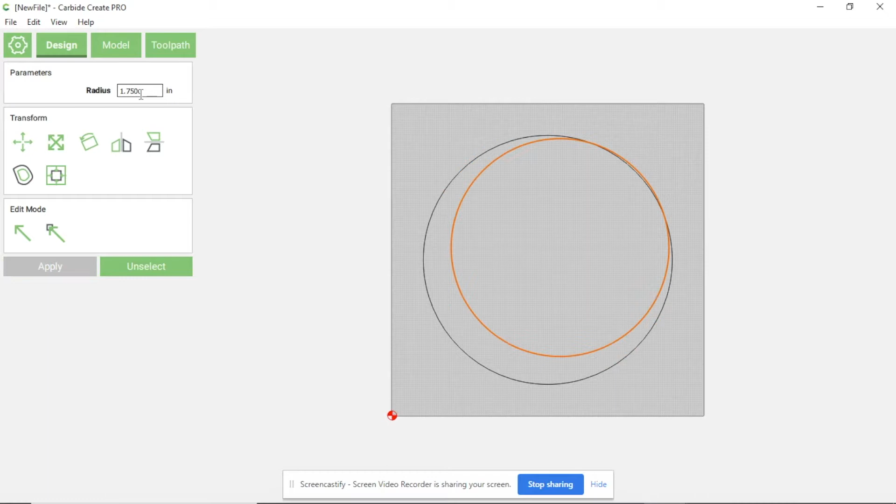So I'm just going to make a copy of this one. I'm going to do Control C, and make a copy. Then I'm going to resize this, I want a 3.5 inch diameter, so that's 1.75 inches radius. I'll just bring that back to center.

That's going to create the inside of the lip, like you guys see right here. That's going to create that inside piece as we get ready to have that lip for it to sit on.

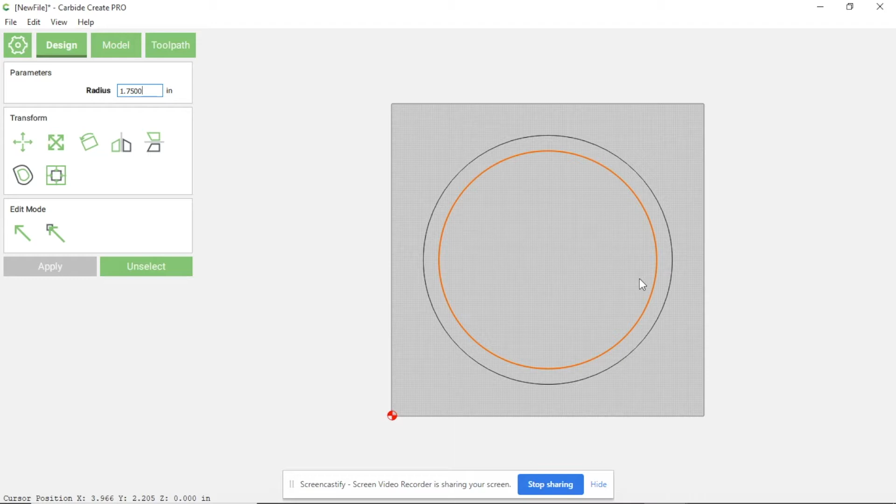Now this is going to have an 1/8 inch lip that goes around there, so we'll just do a little quick math, an 1/8 inch on top of that. I'm going to make a copy again, Control copy. So what's 1.75 minus 0.125? So 1.75 minus 0.125... that'll be 1.625. Hit enter.

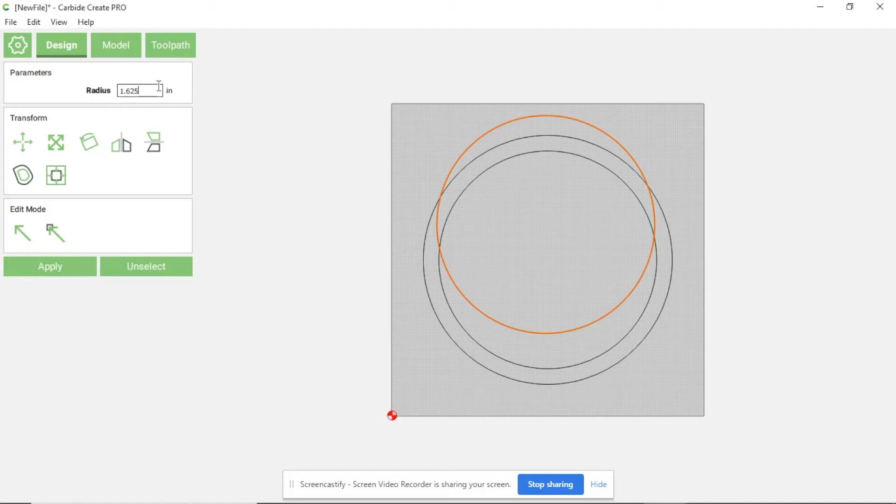Again, I'm going to center that. That third circle is going to create the inside lip that we're looking for, that the sounding board will sit on top of. So we just added that there.

All right, the next part I want to show you guys how to make is the center of the turkey call, where the sounding board is going to rest. You'll have the inner lip to hold it in place, but you also want this section to be able to support that sounding board.

So we're going to start in the middle. Again, I'm going to start by just making some circles. The inner circle I want to be 0.75. Go ahead and center that to the stock.

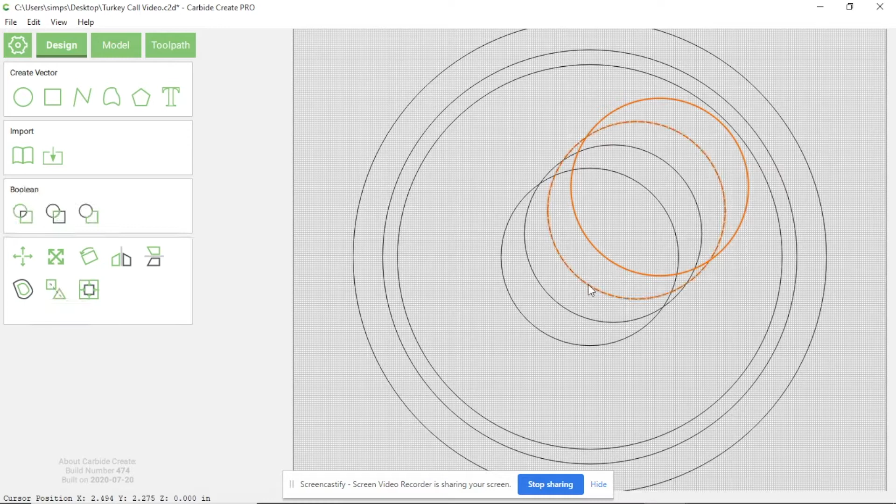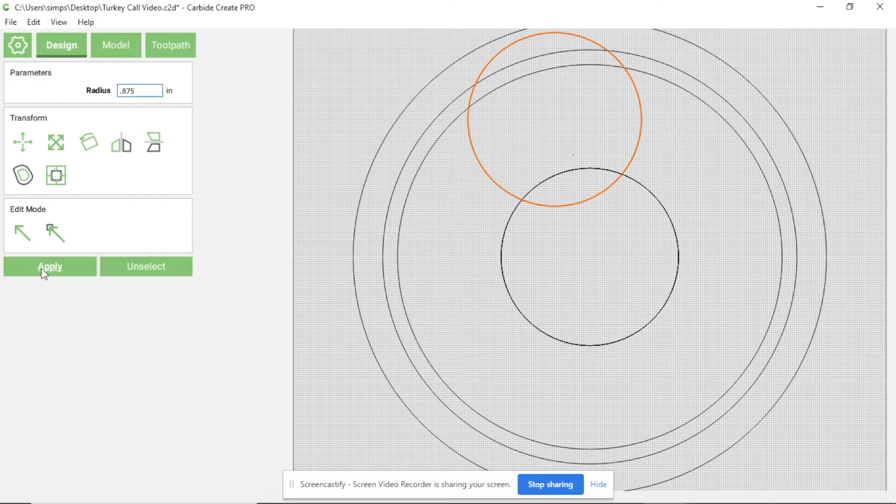I'm going to make 3 copies, and I'll explain why in just a minute. I'm going to select those all as well, and align them to stock and center. Then I'm going to make one more circle, and this one's going to be an 1/8 inch bigger, so 0.875. Again, I'm going to center that to the pieces.

Now, in order to get this little indentation cut out, we've got to go through some of the process using the Boolean, intersection, and subtraction features. So I'm going to start with a rectangle.

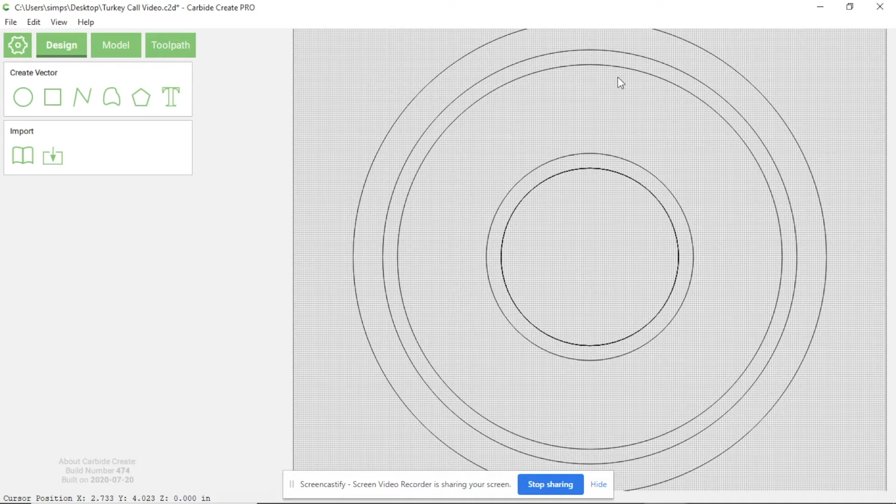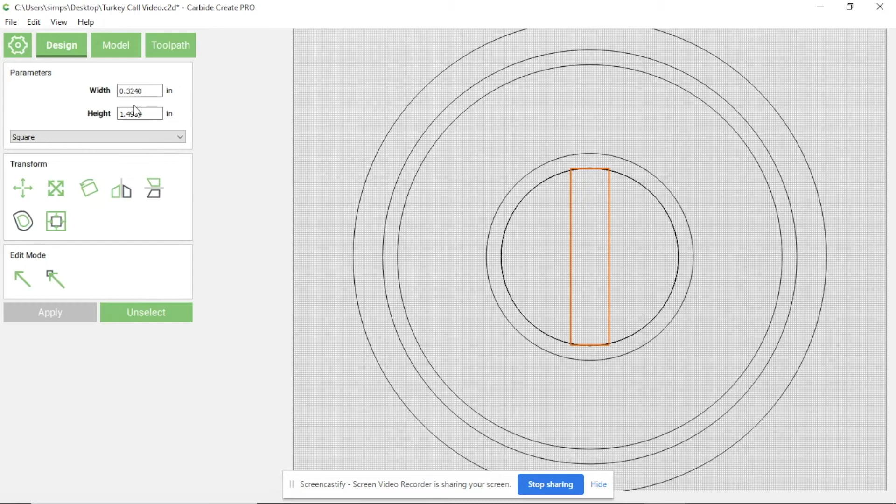So I'll go to rectangle over here and I'm just going to draw. I want that to be 0.5 by 2 inches, and again I want it centered. Put that in there. I must have hit something wrong. I want that 0.5 by 2. All right, there we go.

I'm going to need 2 of these, so let me do a copy of that, Control and Shift and C, and then I want to align those. So again: inner circle, the rectangle, Boolean feature, subtraction. Okay, then I'm going to do the same thing with the outer circle.

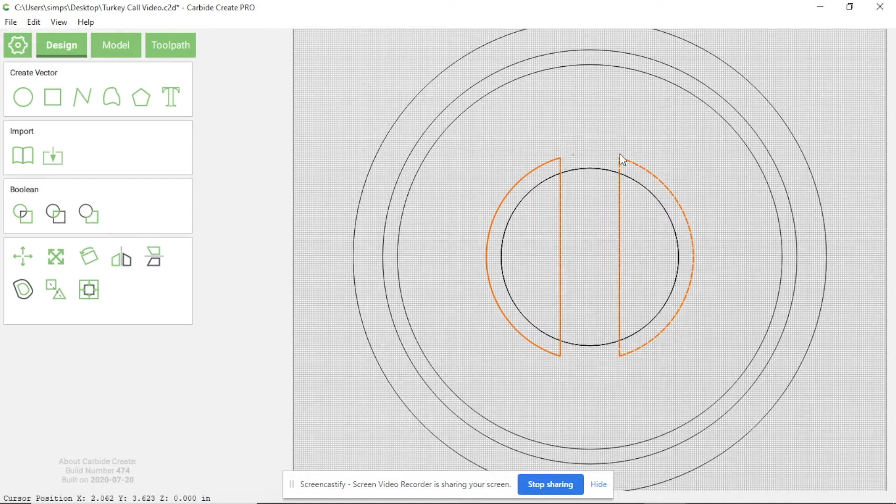Click that rectangle, and then I'm going to do the subtraction feature. Now I've got these inner circles again, so I want to start with this half circle of what I've got, and I'll click that first. Then I'm going to click one of the other inner circles and hit the subtraction feature.

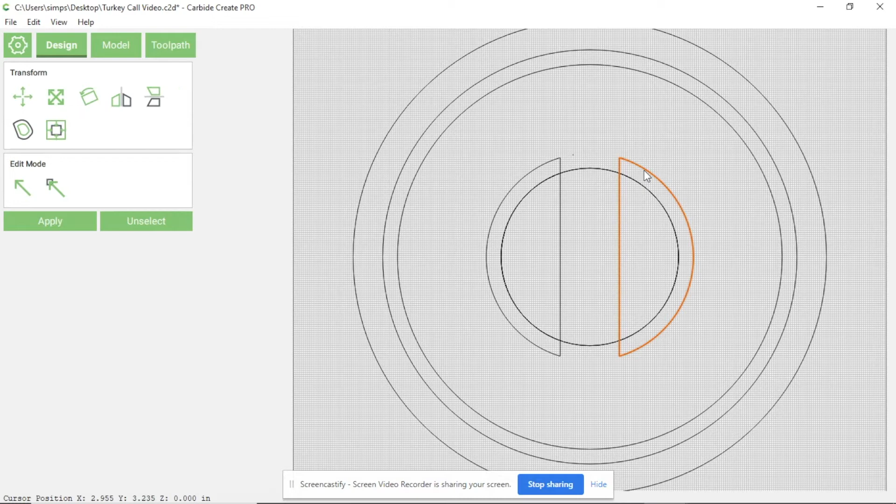Lastly, I'm going to grab this other side, the half circle. I'm holding Shift, I hit the inner circle, and then I hit the subtraction feature.

And then if I come back in, I'm going to highlight that and hit delete. I'm going to highlight that and hit delete. I'm going to highlight this and hit delete. And then I have this inside circle that's been created on the design.

Now within this, I can select these and do a tool path that will show a pocket. So let's click on that.

I'll change this to a quarter inch end mill because that's what I'm going to be using. Whenever we look at that, we see the pathway it's going to do, and I'm using all of the standard settings that are already programmed into Carbide Create.

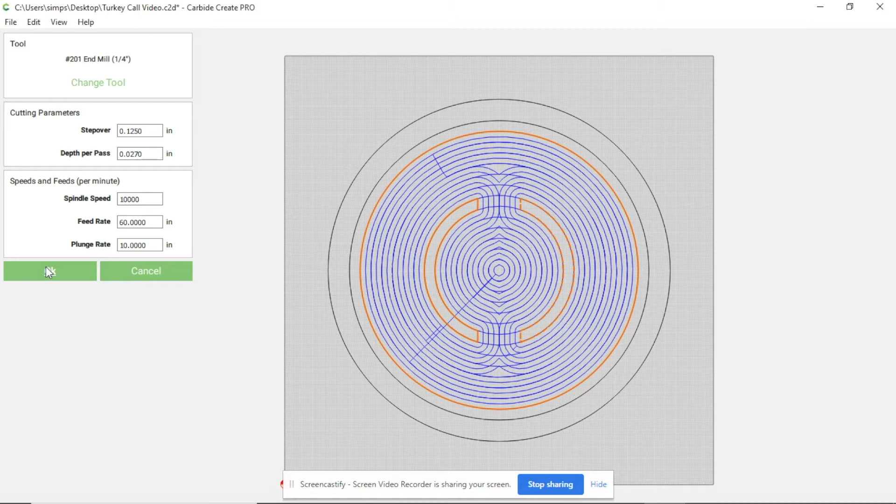I hit OK, hit OK again. Whenever I come out, I look at the toolpath that's going to happen, and it says for me to go from 0 to 0.8 is going to take 5 hours and 51 minutes. We know that that's just not feasible.

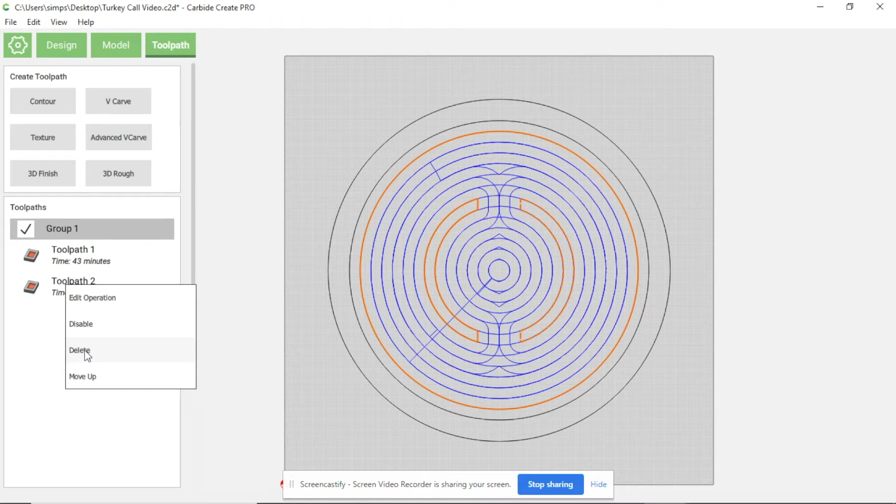So I'm going to have to try a different solution. What I'm going to do is just make some circles and see if we can cut that down. So let me delete that and go back to the design.

I'm going to copy, and we're going to end up making 6 more circles. I'm just going to hit Control and copy: 1, 2, 3, 4, 5, 6. Then I'm going to go back to this particular one and start making those sizes.

This one needs to be 1.385. Since I'm using a quarter inch end mill, I'm just going to use a slightly smaller circle than a quarter inch. So the way this is set up, it looks like I'm using 0.24, and I'm going to have a little bit of overlap there as we go through that.

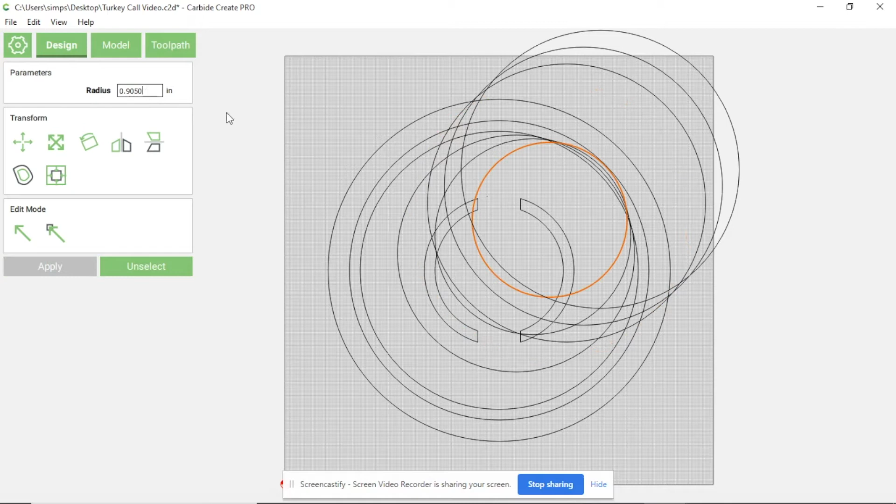Then I've got 1.145, okay. I've got 0.905, I'm going to hit OK. And I've got 0.5, I'm going to hit OK.

Now all of these need to be centered, so I'm just going to hold Shift and start clicking these guys. I've got to get them in the center of the deal here.

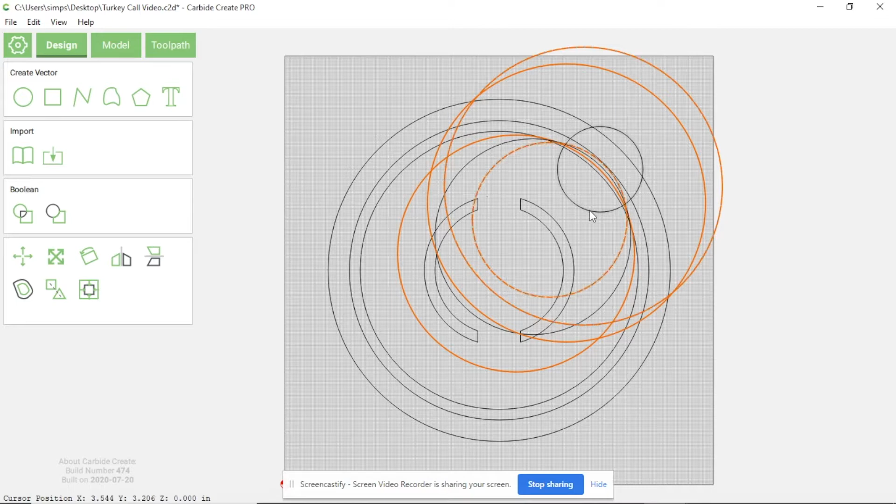So I want that aligned to stock. Something didn't happen there, align to stock. Try again. Align to stock, boom. Oh, there's one more that I missed here. We'll align that with the stock also.

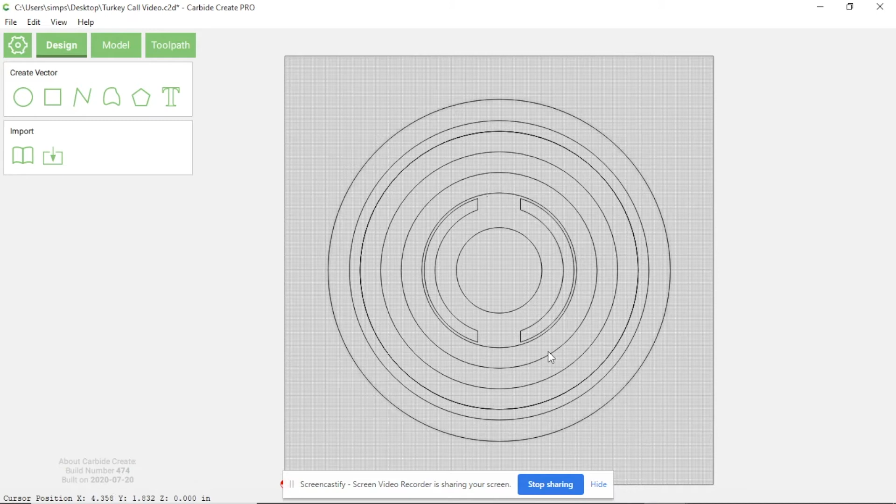So now I have all of these different circles, and we're ready to start going in here and cutting and setting up the tool paths for this. I think we're going to find that it's going to be much less time than what we said.

The other thing we want to do on the turkey call is make these sound holes, and each of these is almost a quarter inch wide. The problem though is you think of this router bit, this end mill, as a drill bit that's just going to go straight down and back up, but unfortunately that's not really how the CNC thing is set up.

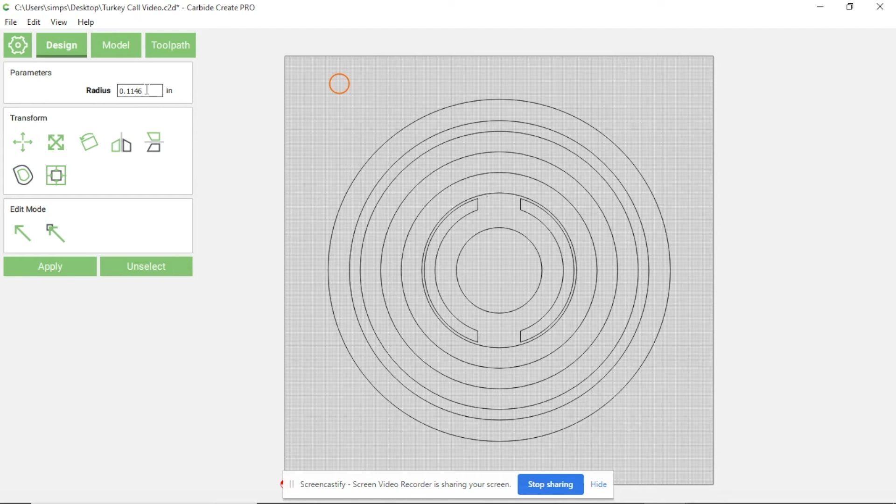So you actually have to make this hole a slight bit bigger if we want it to end up being 0.25. We'll set these at like 0.27 as far as diameter, and we'll be able to accomplish our goal here. Let's do 0.27.

If you look, remember when we hit 0.27, that's radius. I don't need 0.27 radius, I need a 0.27 diameter, so 0.27 diameter would be 0.135. Okay, let's just do 0.13 and get it like that.

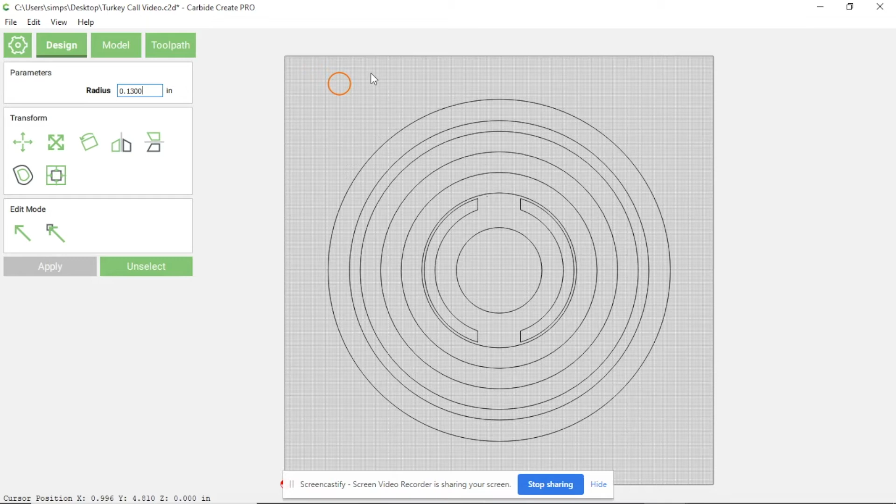Then I'm going to make some copies. Again, I'm holding Control and C. Control C: 1, 2, 3, 4, 5, 6, 7, 8, 9. Made one too many. Well, let's just drag these and pull them all down here.

So we'll start by dragging these guys in here, and I'll do a center alignment. I'll just get these kind of close, and I'll use the circle that's already in place to help me get the alignment that I need. We'll get close, and then we'll add a little bit more here.

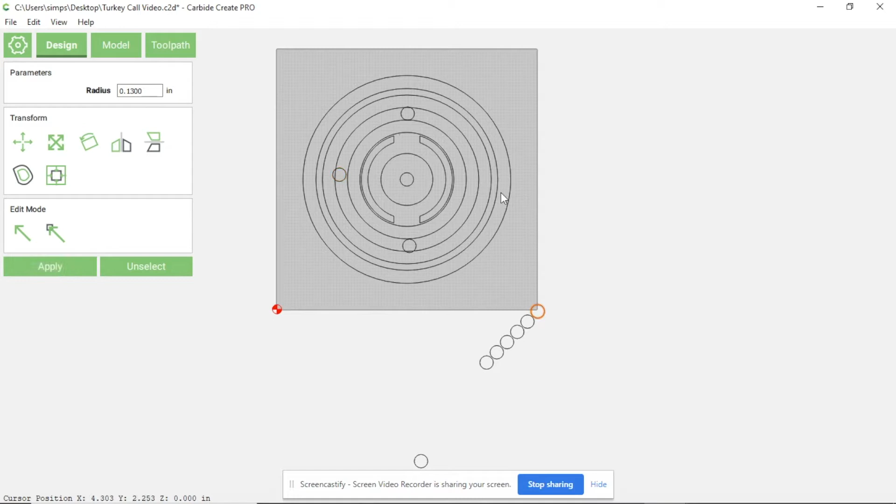There we go. So I'll click this one and this one, and we will align that left to right.

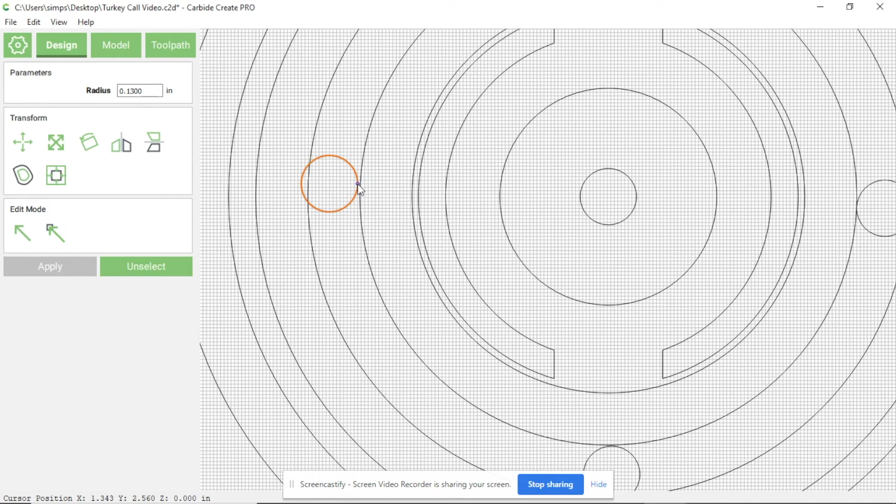Let me zoom in there. You can zoom in and get this right on the edge of that other one. So got those two, and on this one we want to align these vertically.

Then again, I can go back in, get pretty close. These don't have to be super exact. I don't think a millimeter off one way or the other is going to impact the sound too greatly. Then the other four, I'll just start eyeballing and try to get them equidistant and placed in there into the design.

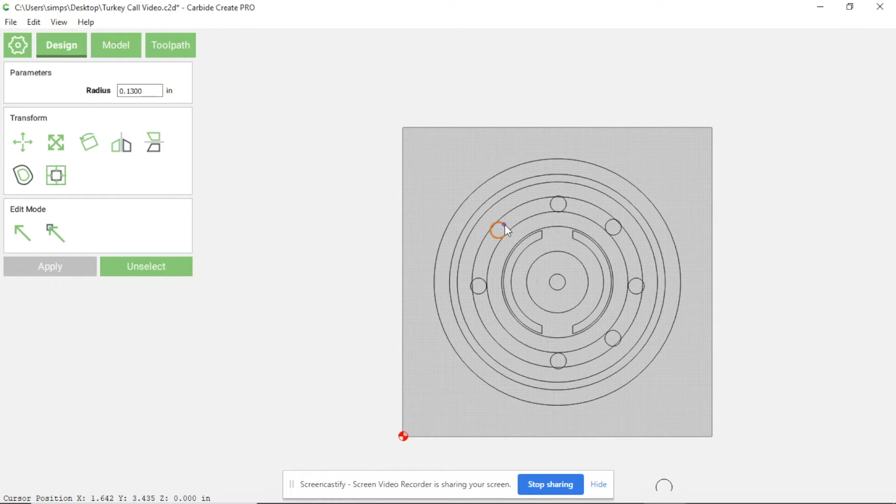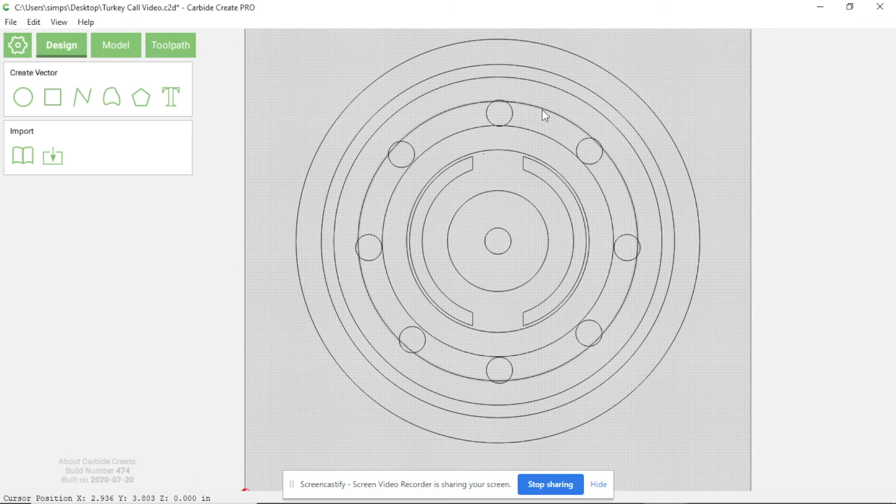That's got them all. Okay, so now if we just zoom in, we can start to see this taking shape as to what we want it to look like. And I think it's going to turn out really, really nicely.

Okay, now again, that's just a quick tutorial on how to get those holes. I have all 8 of those aligned now. I've got the center hole aligned in there.

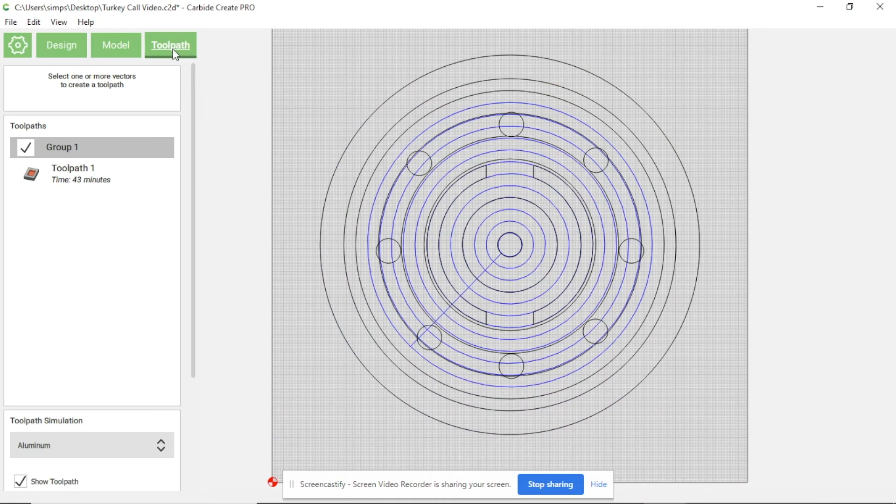Now it's time, we've got everything designed. Everything now is in the program just like that we want it to be. And it's time for us to set some tool paths. So let's switch over there, let me get to that point of at the tool paths.

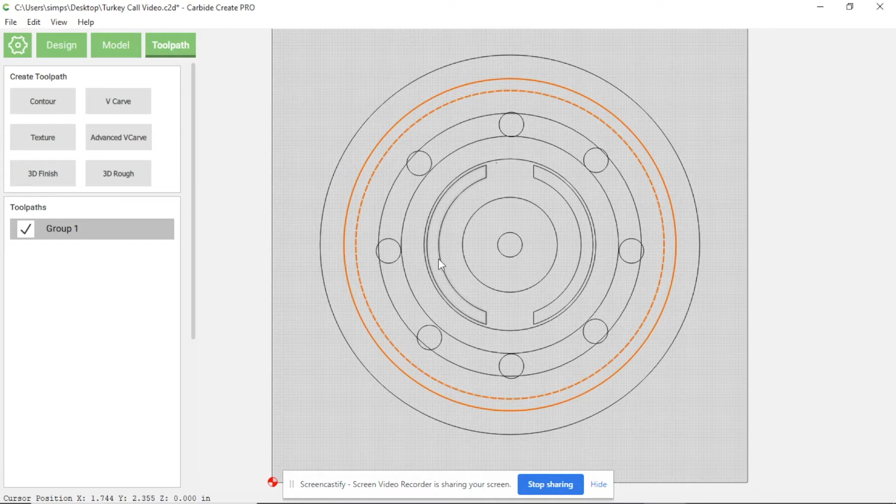And so I'm just going to delete this one. I don't even remember what we did with that, and we'll just start over. But the way that I want to make sure I do this is that this level between here and here, and then these guys.

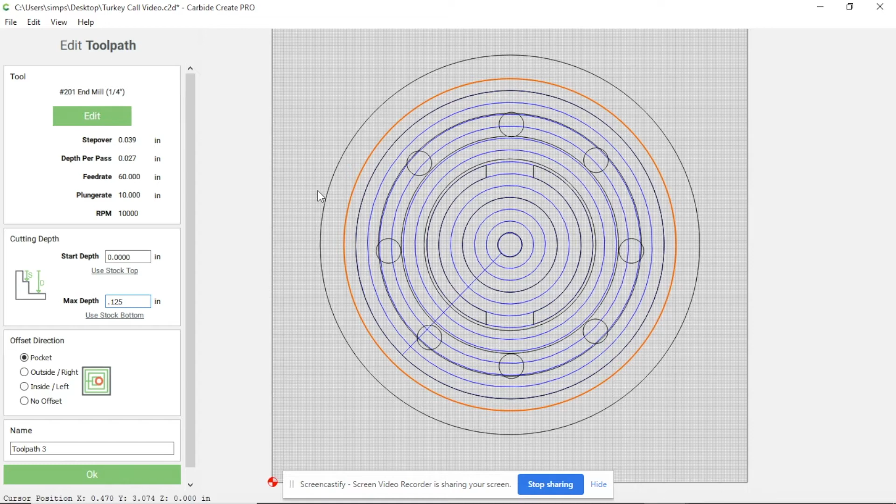All of those have to be the same height. And so I'm going to start with a pocketing path, and I want to cut down, do a contour. I'm going to do a pocket, and I want to go from 0 to 0.125 because I want to go an 1/8 inch deep, because that's exactly the thickness of the soundboard that I'm going to make. And so I'm just going to title this top pocket. That's going to take us 8 minutes.

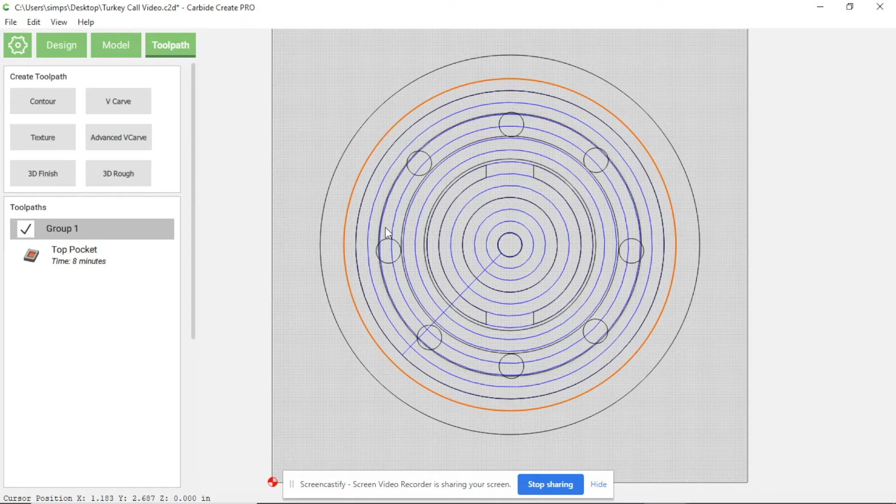Then we start going in a little deeper and a little deeper and a little deeper from there. And so I'm going to click this guy. I'm going to do a contour path. I'm going to start depth at 0.125 because remember we're already there at 0.125, and I'm going to go down to let's just go to 0.75, and we're going to do an inside tool path, and you'll see that going there.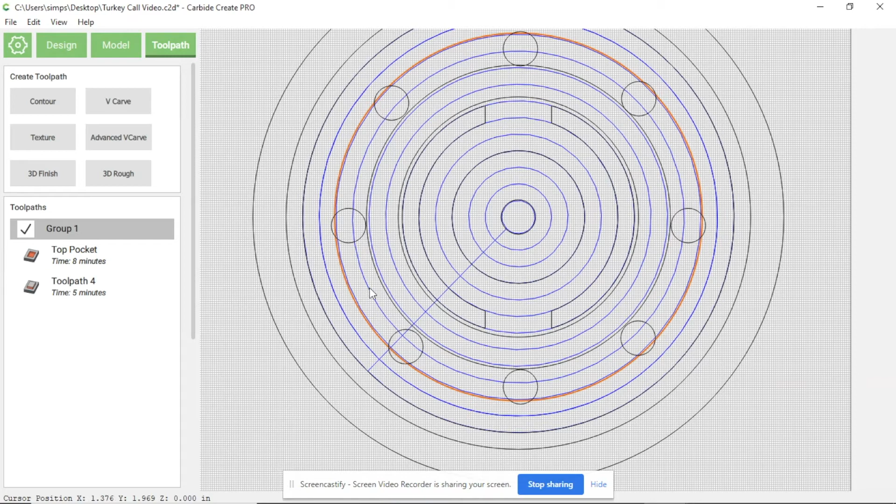Okay, that's our path. Then we'll go to the... it's kind of hard to see them now. Let's go ahead and disable these so we can see them. Enable. So let's see where we've been. So we've done that one.

Now we're going to do the inside here. Do a contour, we're going to do an inside path. We're going from 0.125 to 0.75. We hit OK. Then we're going to do here.

We're going to hit contour, we're going to do it inside. We're going 0.125 to 0.75. We're going to hit there.

This one's a little bit tricky. See how close it is to those that outside. I'm not sure that I want to do an inside tool path. Obviously, if I do an inside tool path, it's going to take off some of that support system.

So I'll probably go ahead and hit contour, and I'm going to make this one an outside tool path. So I'm going to click outside here, and it's not going to get right up next to that base there, that stabilizer, but it'll be really, really close. If anything, it'll make that a little bit thicker, and then we can go back in with the chisel and take out that little bitty part right there.

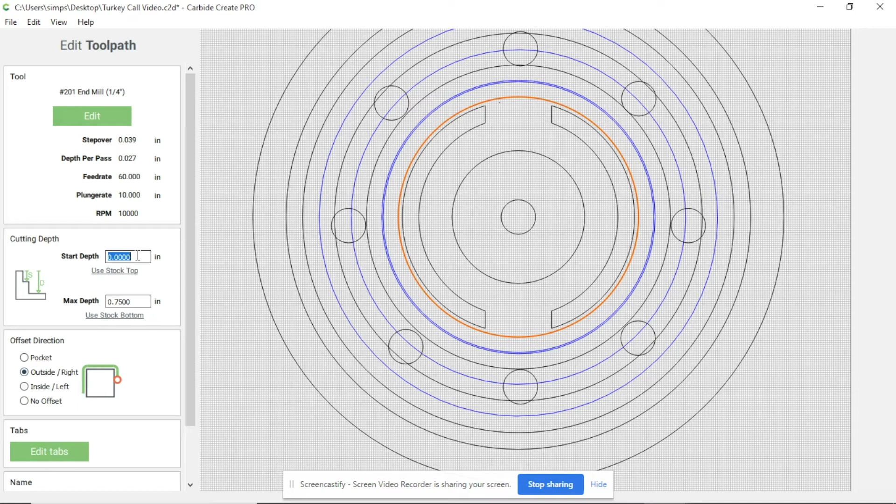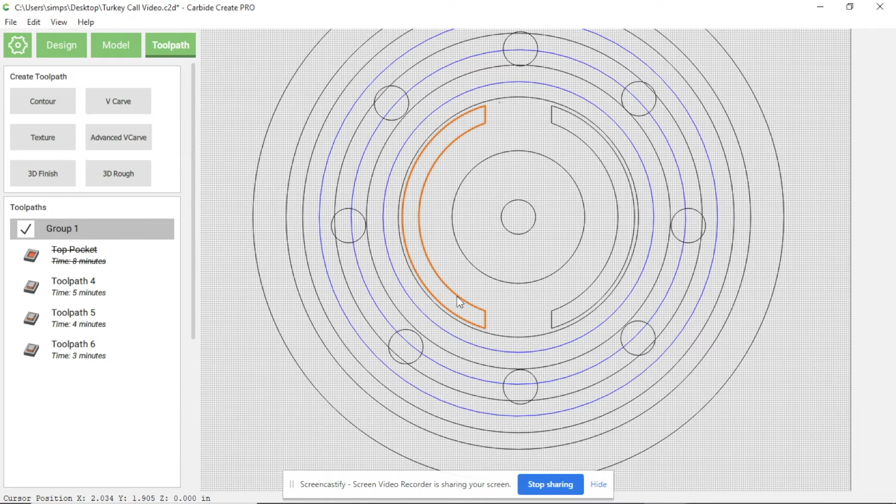So we're going to start again at 0.125 and hit that. I'll tell you what, let's go back and let's make this better, let's just delete this. We'll just go back and we'll say this one, this one, and this one. Let's do contour, and let's do outside right on those.

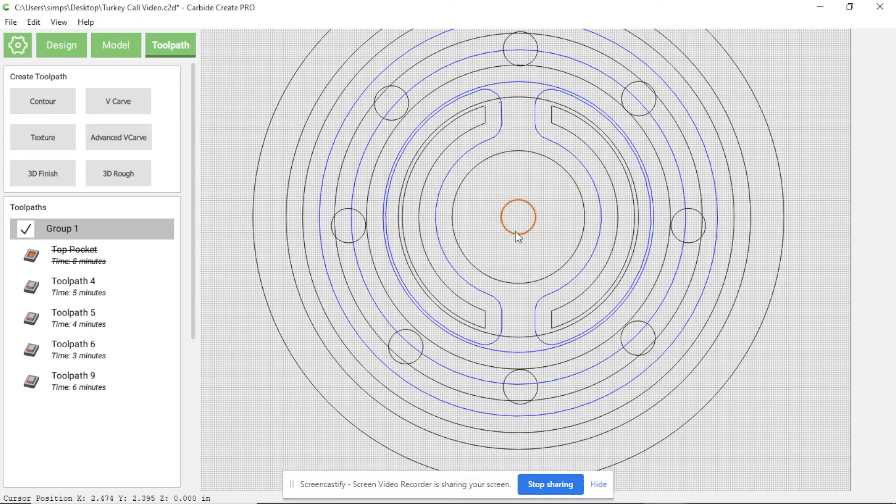And so that's going to get that part there. And then let's go from here, here, and we'll do... let's do a pocket on that one. That should get all of that area.

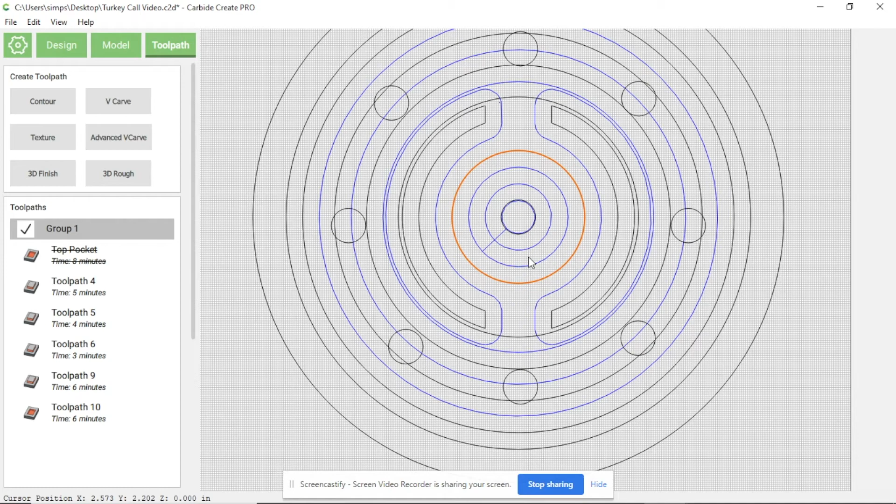Okay, so we've got all of those in place. I'll just go through them again really quickly so we can see. We've got our top pocket that's going to take it down 1/8 of an inch. We start doing paths going from 1/8 of an inch all the way down to 0.75, and we just keep going inside to inside. Okay.

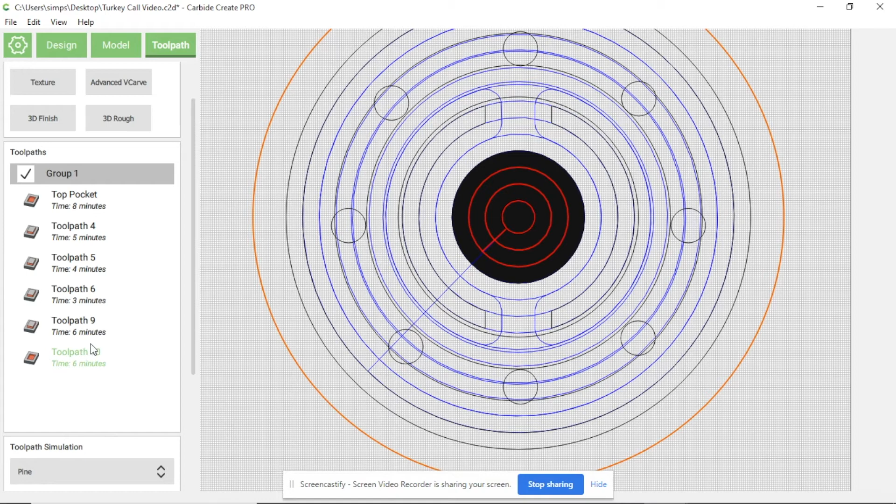The next thing that we want to do is make sure that we get our holes drilled. And so again, we couldn't use just the single 1/4 inch bit.

So we had to make those just a little bit larger than 1/4 inch. I'm going to highlight all those and climb in here to contour again. This time we're starting from where we've cut this all the way down to 0.75 already. Whenever I measured with my caliper, the blank that I had was 0.91, so I'm going to go ahead and go to 0.92.

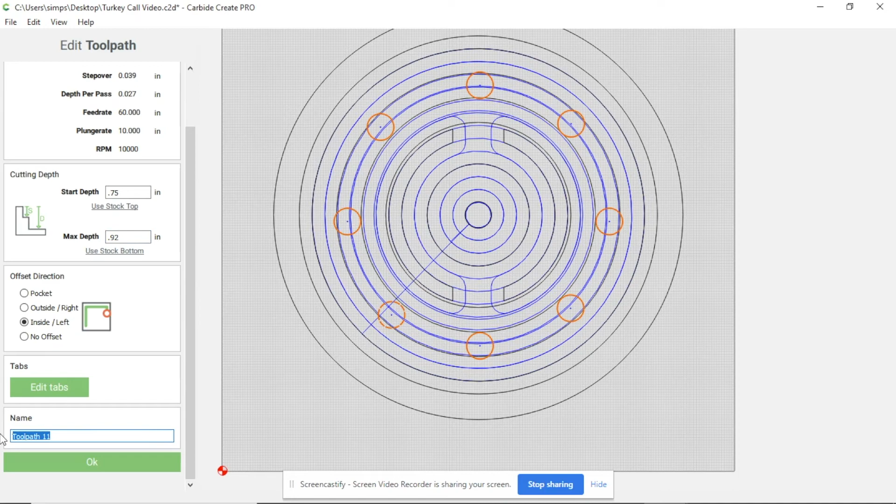That way I can get it done. I want this to be an inside cut, on the inside of that hole, and I'm just going to call this sound hole. That's going to be done in under 2 minutes, so that's good.

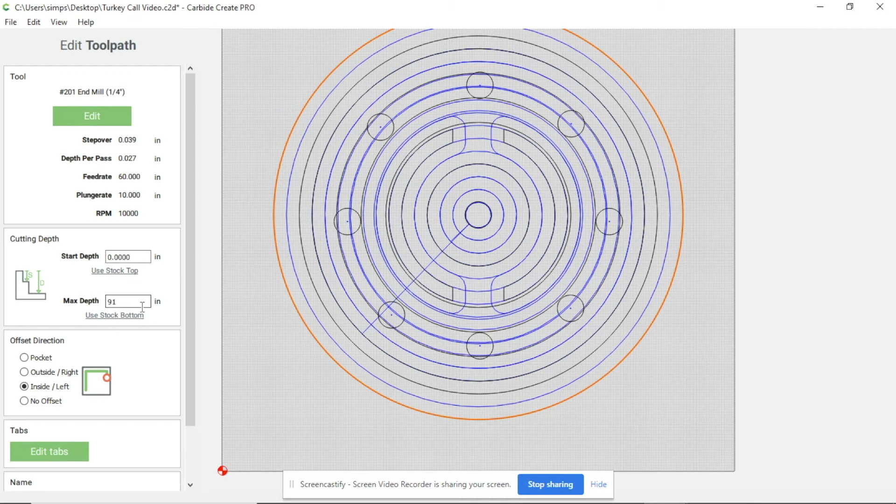Last thing we're going to do is cut this thing out. So again, I'm going to go to the outside and hit contour. This time I'm going from 0 down to 0.91, because that's the size of my caliper, and I'm going to do that on the outside.

I also want to make sure that this time I don't make a mistake, so as it's cutting, I'm going to add some tabs. Some of you may not use tabs, and oftentimes I don't, but in this kind of piece I'm going to go ahead and use some. To add tabs, it's really easy—you hit Edit Tab, click where you want your tabs to be, then set your width and height right there. I'm going to have 4 tabs; you probably don't need that many, but I'm going to do that. I'll label this outside cutout.

At this point, I think we have all of our tool paths. If you remember, I showed you that original pocketing pass, and it was almost like 6 hours, something crazy. If you start adding all these up—8 minutes, 5 minutes, 4 minutes, 3 minutes, 6 minutes, 6 minutes, 2 minutes, and 10 minutes—what are we? Somewhere around 35 to 40 minutes.

Once I get it on the machine and make sure that everything's going the way that I want it to, I start amping that up, using that percent feature and giving it more than 100% as it goes about.

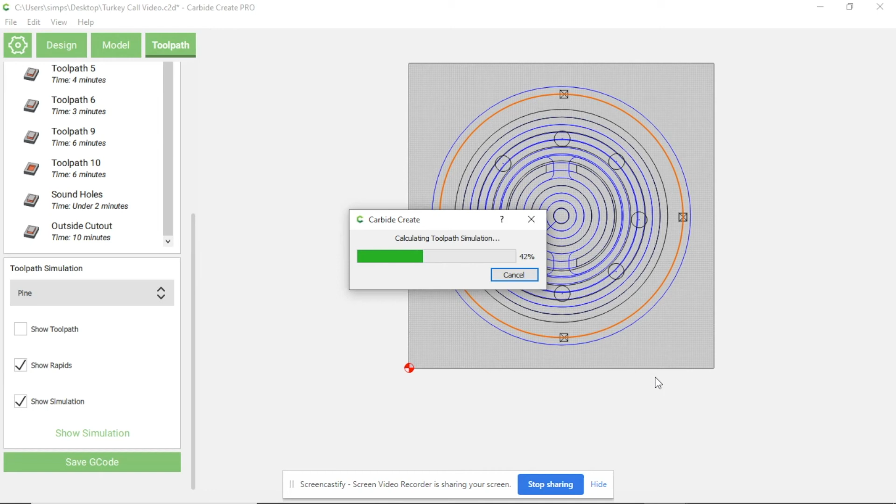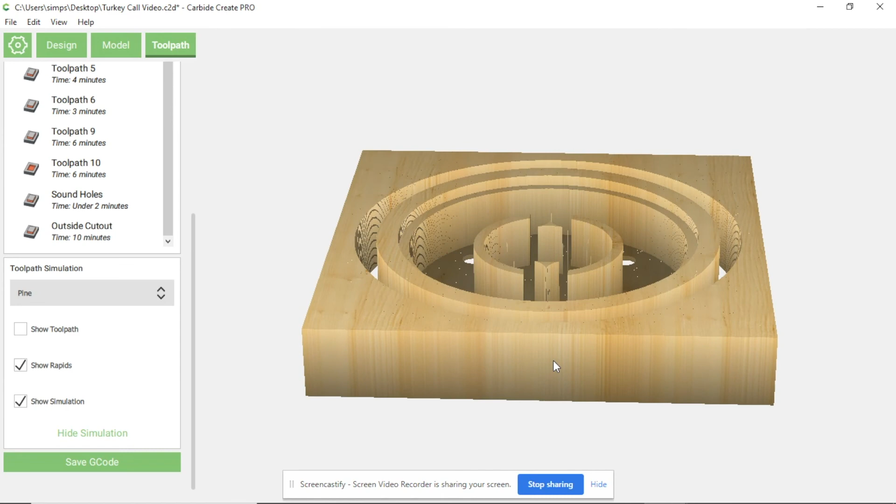All right, so this is what we're looking at. I'm going to tilt it just a little bit, and you can see we start with a flat piece. We drop down 1/8 of an inch here, and we did a complete pocket on that, making sure that height is the same throughout. Then we just did a series of circles, and those circles get cut out and cut out and cut out, eventually getting down to the bottom of 0.75.

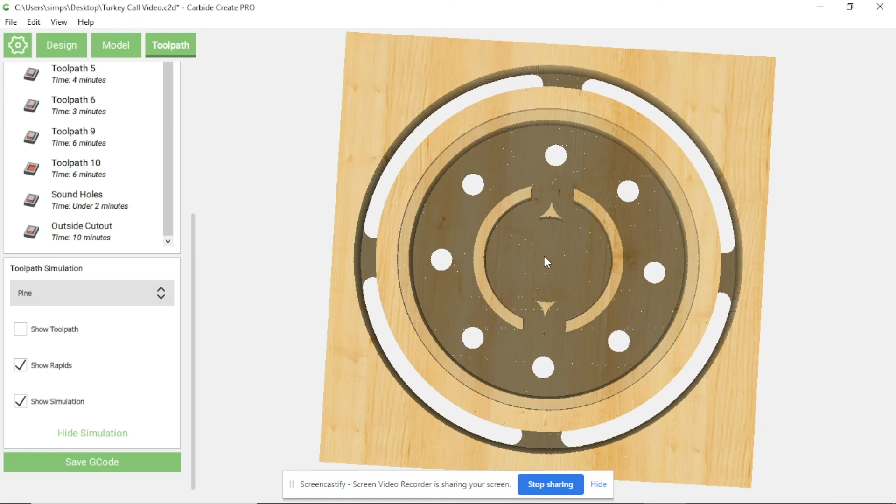I do see one issue as we look at the simulation—I'm missing my middle hole, so I can't do that. I'm going to go back and add that in where it says sound holes. I'll hold shift and click that one to make sure I get that. Oh, we can't leave that guy out.

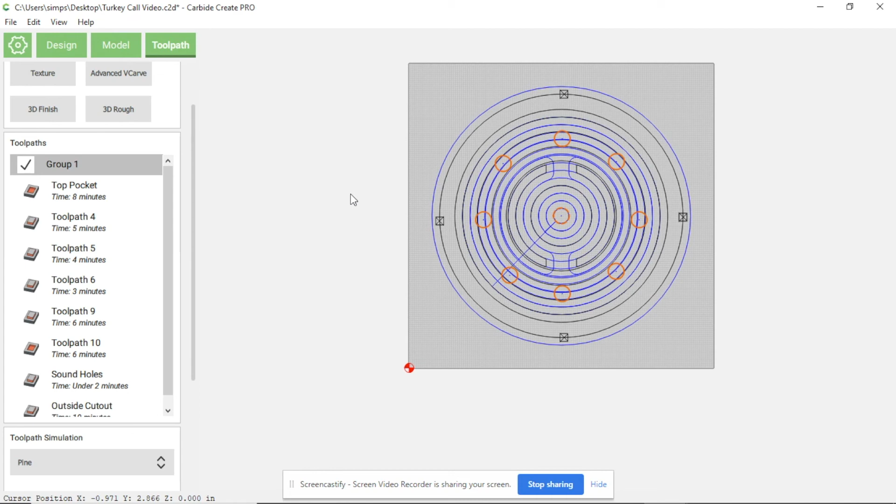So at the end, this is my design, and hopefully as you've walked through this process you've been able to see how I've used Carbide Create.

Thank you so much for watching through the end of the video, and hopefully all of this makes sense to you. Using Carbide Create to do this is a different way of doing it—I'm sure there are a million different ways I could have used Carbide Create to design this particular piece. This is the way I chose to do it, and in my mind, that's how it made sense.

At the end, you're going to have a nice little piece that looks something similar to this. I hope that the next time you see this, it's going to be a finished product that has a soundboard on it, making some purrs and some yelps and getting ready to call those gobblers in for spring turkey season. Hope this helped you out.